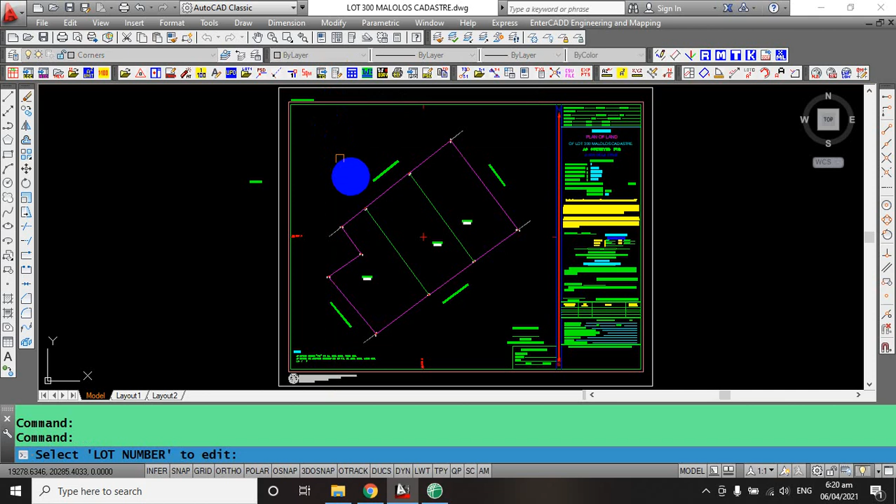So proceed na tayo sa next step. In case nagkaroon ng mga changes along the line, minsan sa validation na-detect niya, along the line nag-a-adjust tayo ng 0.01. So for example dito, sa Latin, karoon ka ng adjustment.

So dito mo i-adjust yung mga binago mo sa e-survey, ilalagay mo kung saan yung changes niya. Pag may changes, save mo lang, parang bago mo siya i-tabulate.

Select text lot number to edit. Select object, select object. Ito ulit yung mga lot number, yung boundary, subdivision lot. Ito yung mga sinasabi ninyong lot number.

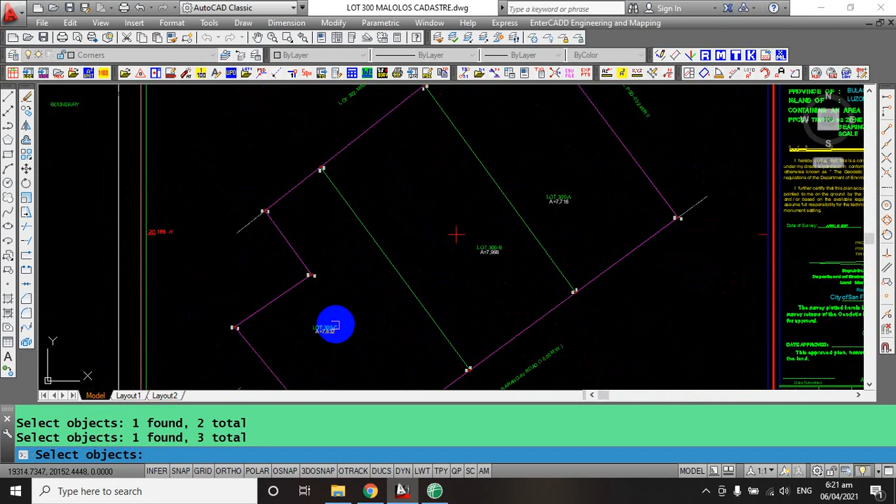Then enter, so scale factor is 800, accept na lang natin kasi 800 yung scale drawing. Enter, so right insertion point, dito siya, no, right insertion point, so click, yun.

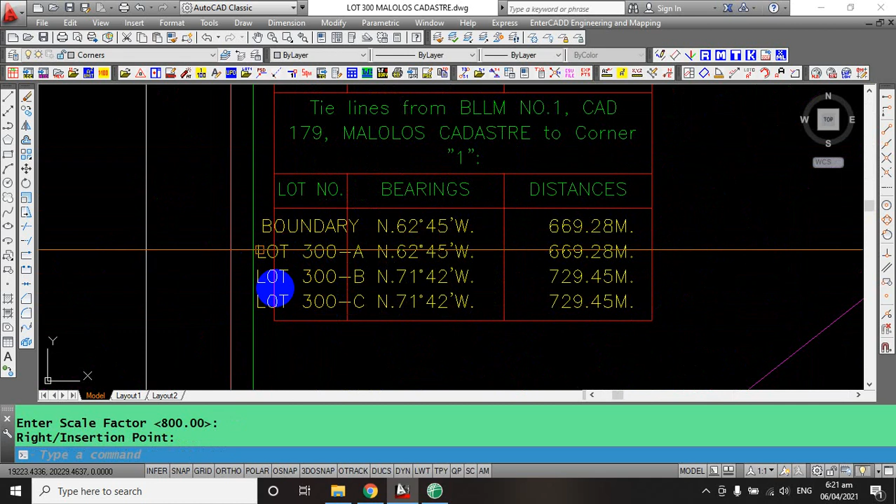So medyo nag-extend na sumobra, pwede mo itong i-edit na lang. So abbreviate na BDRY, caps lock. Then itong lot, out na lang natin itong lot kasi lot number na dito sa taas.

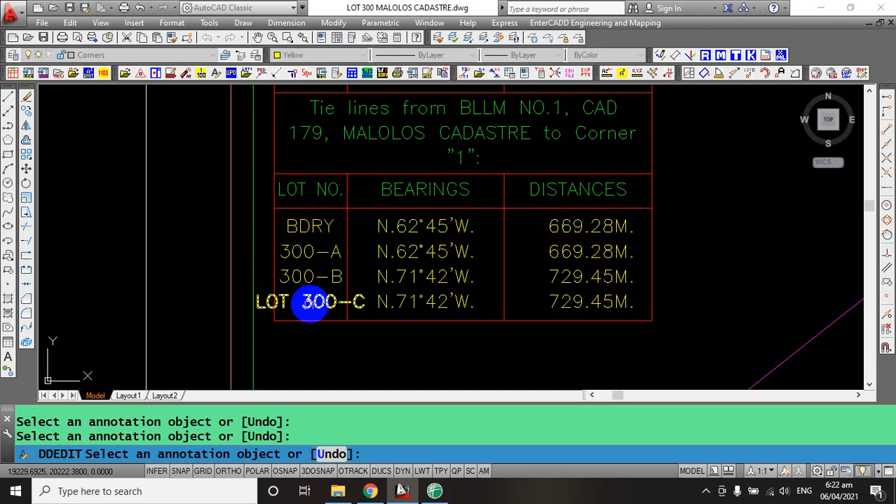Okay, so AutoCAD commands na lang to, magiging na sa finalization na lang ng plan. And then lot data computation sheet in MS Word.

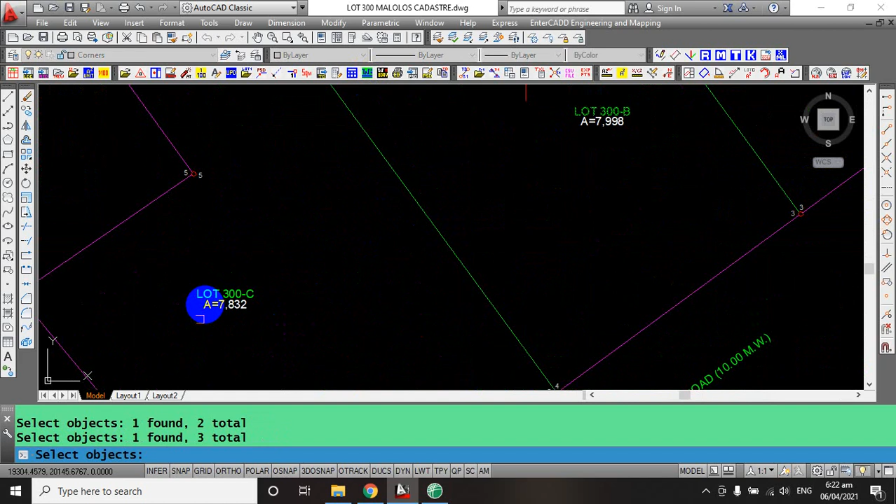So again, select lot number, then enter. So papunta na yan sa MS Word na magre-report na yan.

Okay, medyo kumabagal na itong computer kasi i3 lang to. Then Office 2003 default, siya naka-check doon, okay.

Yan, so i-arrange natin yung tag na page layout. Page layout. Then yung margins, custom margins.

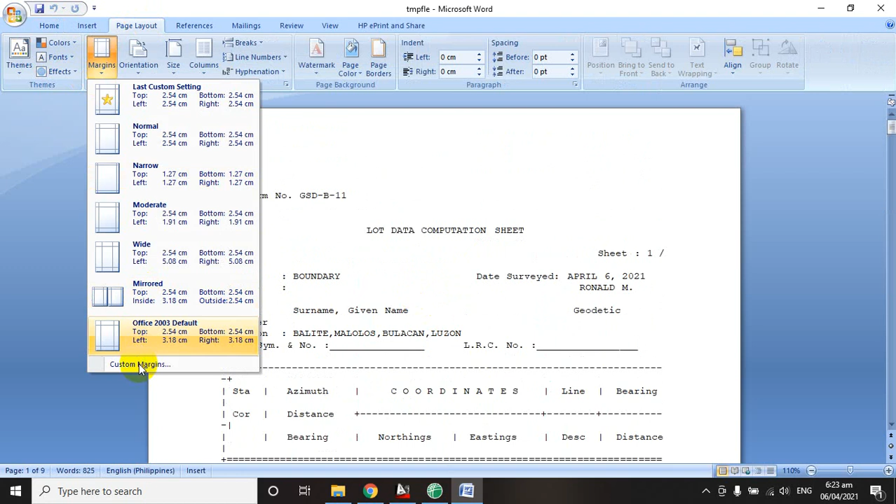So naka-centimeter siya, lagyan natin kalahati ng 0.5 siya is 2, ano ba nakalagay, 2, so 0.5 gawin na natin 1.25, dito is 0.

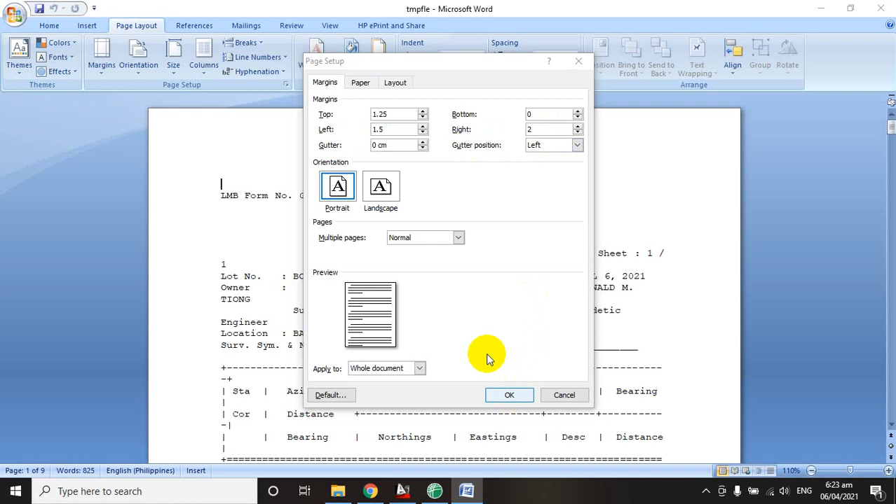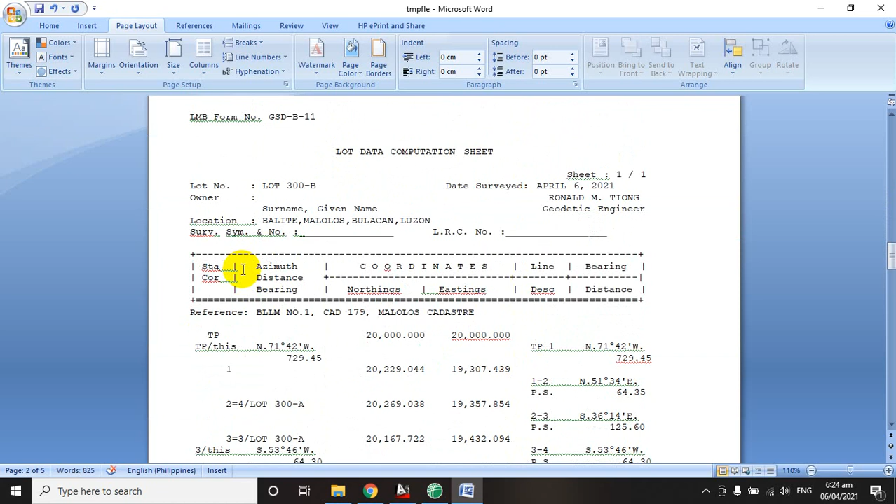Ito yung lot data computation niya. Na-notice ninyo wala yung station, yung traverse station niya, so nag-side shot siya along the corner ng boundary. Kaya this nakalagay, isang option niyo, kung gusto ninyo ito yung output ninyo or yung merong traverse na natawag sa close.

Okay, so tabulated na siya, then na-report mo na. Ito is boundary computation sheet para sa LRA ito. Then ito yung lot description, pag hindi kasi sa form yung lot description, may separate form set ngayon lot description. Since sa case ng simple subdivision, kasya pa naman siya sa natin sa approval plan ng TD.

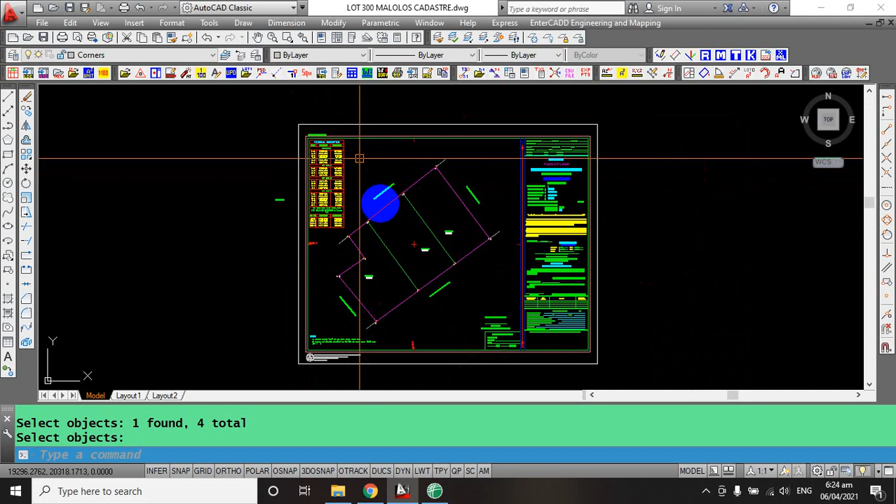So next is ito na tag nating set adjoining lot for narrative TD. Ito, preparation na papunta sa ano natin, sa ETD coding ano ng Laris. So okay, click natin command.

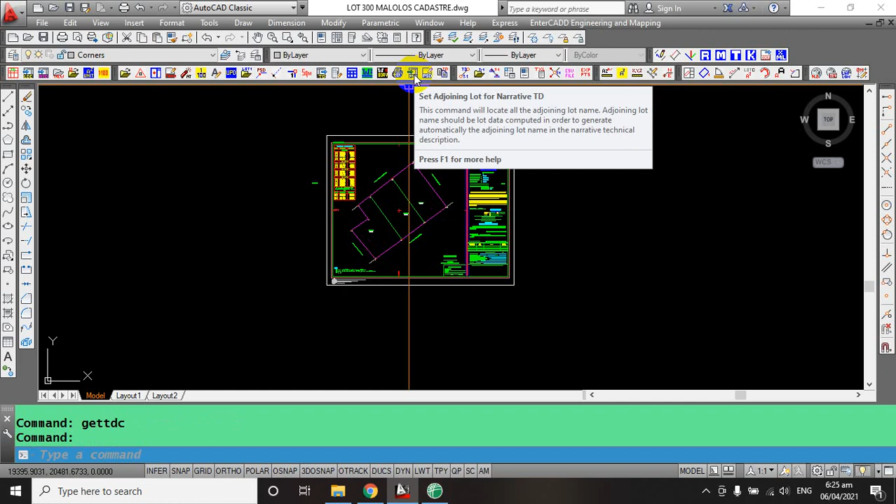So nag-process siya, the next command is the edit boundary adjoining lot. For example, kung letter A, kung lot A. Okay, napansin ninyo wala naka-attach na 1 to 2 dito, sa northeast. So click this bar.

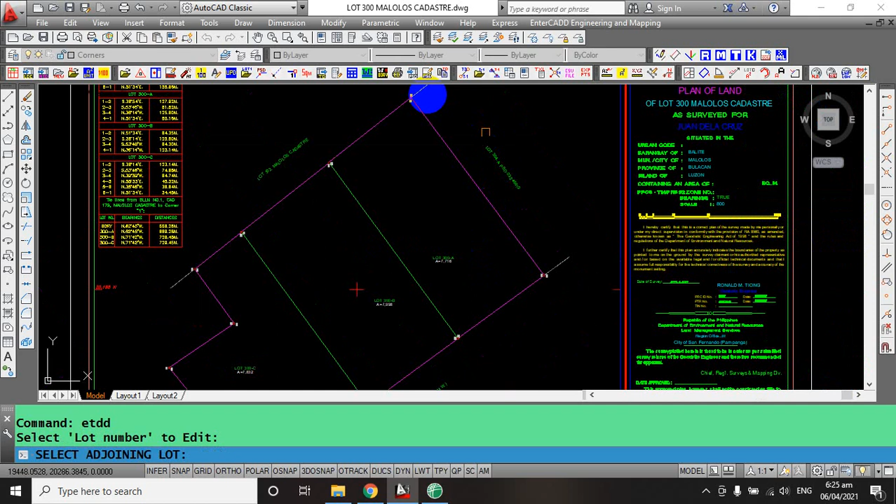Ito yon, along 1 to 2, ito daw adjoining lot niya, yun, nag-attach na. So sa 2 to 3, wala rin nag-attach na adjoining lot dito. Click this bar, so ito yung 2 to 3.

Okay, so 3 to 4 is PSD-03. Kunyari yung approved number mo is lumabas na isa, ano ba yung approved number na is 2,4,6,8,10 na lang, for example. Okay, so ilalagay mo na yung approved survey number mo.

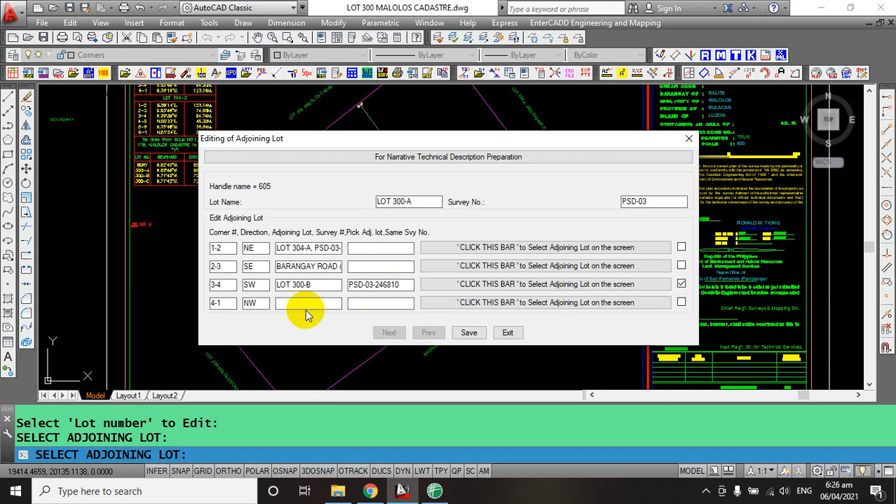From 4 to 1, click this bar, from 4 to 1, ito, yun, ito yun, yun na siya. So nakumpleto na yung attachment dito sa adjoining lot and dito sa survey plan na tinatawag.

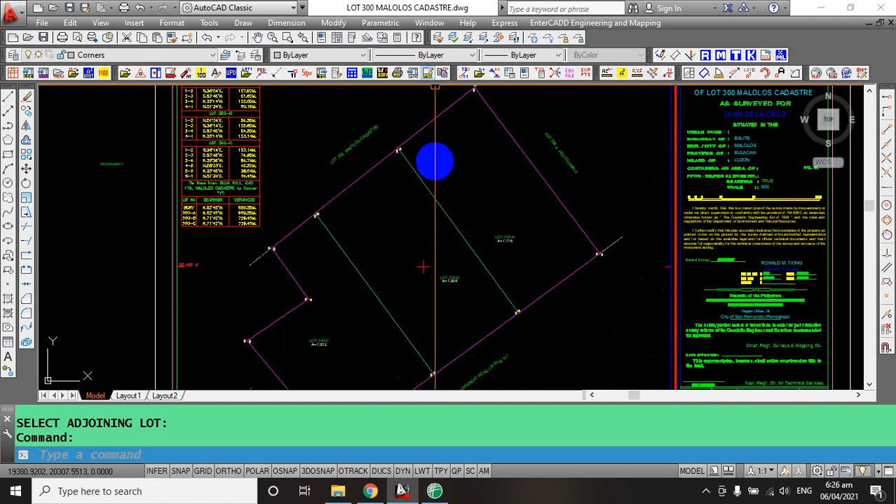Yun, save. So ganun din sa ngayon, edit natin yung content nitong lot B, 300B. Okay, sa 1 to 2, wala naka-attach, so click this bar. Along 1 to 2, sabihin 1 to 2, ito, 1 to 2, along 1 to 2, ayan, ito is, click natin to.

So nag-attach na rito. 3 to 4, wala ito, so lagay natin dito is 2,4,6,8 na, 2,4,6,8,

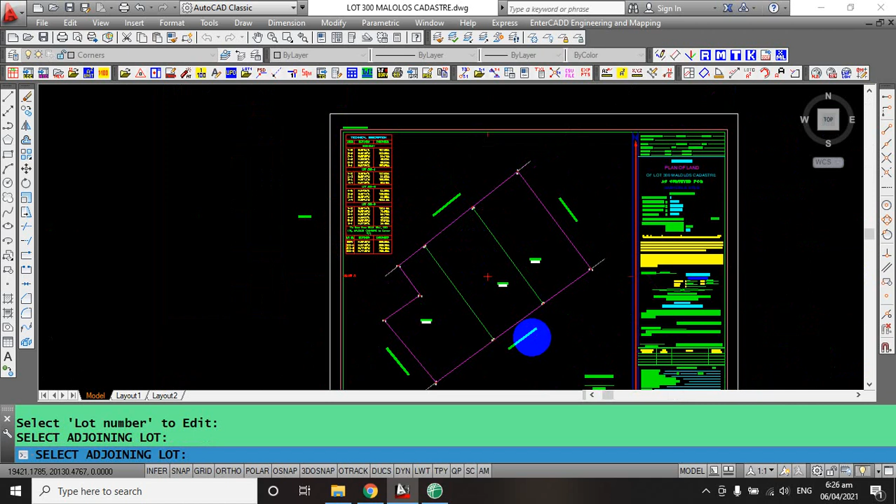10. Then 3 to 4, click this bar, 3 to 4 is ito. So may 4 to 1, may naka-attach na, pero ito is yung survey plan niya is 2,4,6,8,10, 2,4,6,8,10. Then save. Then last is the 300-C.

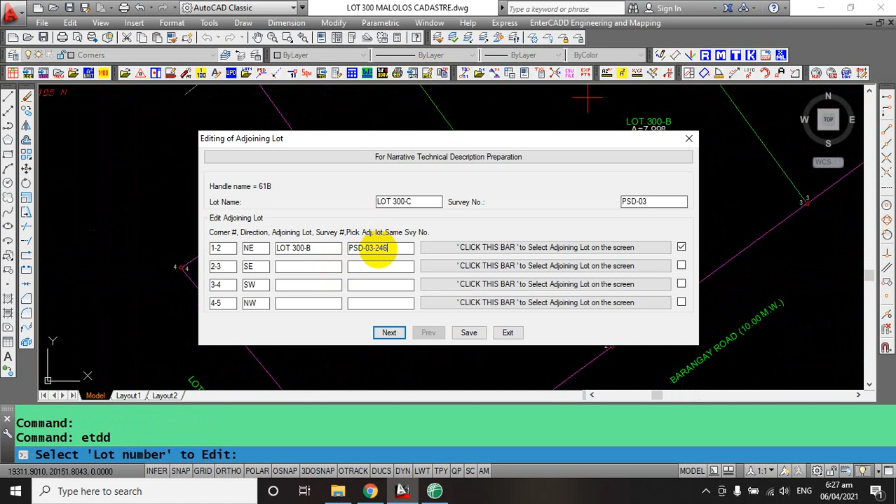Edit boundary adjoining lot, so click. Okay, ito, ang survey plan nitong lot 300B is 2,4,6,8,10. Wala naka-attach dito sa 2 to 3. Click this bar, sabihin 2 to 3.

Ito, 2 to 3 is Barangay Road. Okay, yun na, nag-attach na. Click this bar, 3 to 4. 3 to 4, ito.

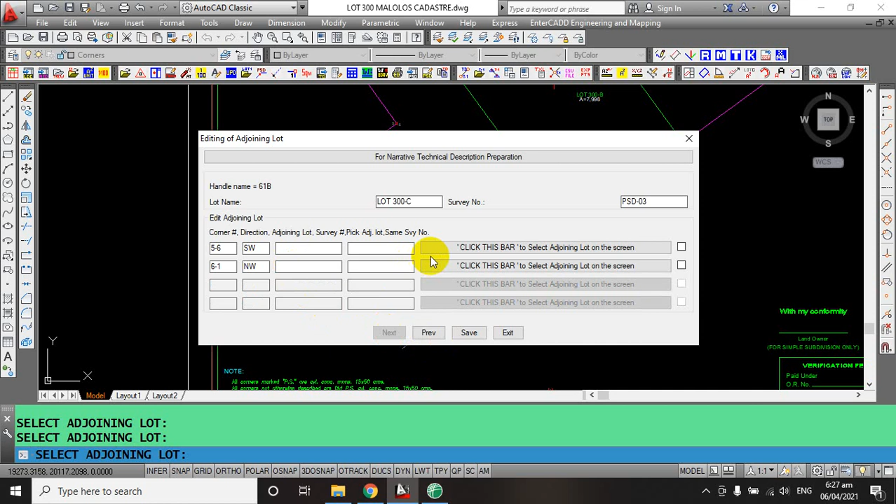Then 4 to 5, click this bar, so 4 to 5 daw, ito, 4 to 5, so ito pa rin. So next, 5 to 6, 5 to 6 is this, pa rin yung adjoining niya.

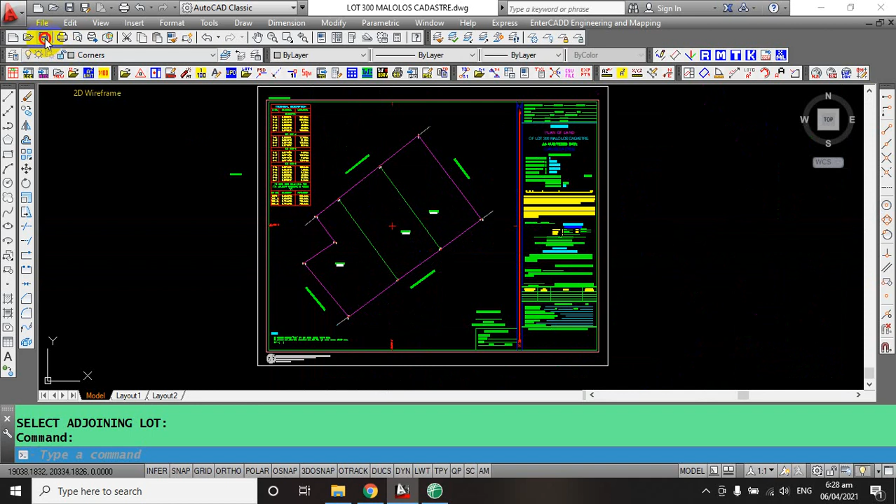Then 6 to 1, walang naka-attach, so 6 to 1, so obviously ito yung 6 to 1, ito na yan. Then save, so completed na yung ano natin. Okay, save, so stop muna tayo doon para maiksi lang yung file.